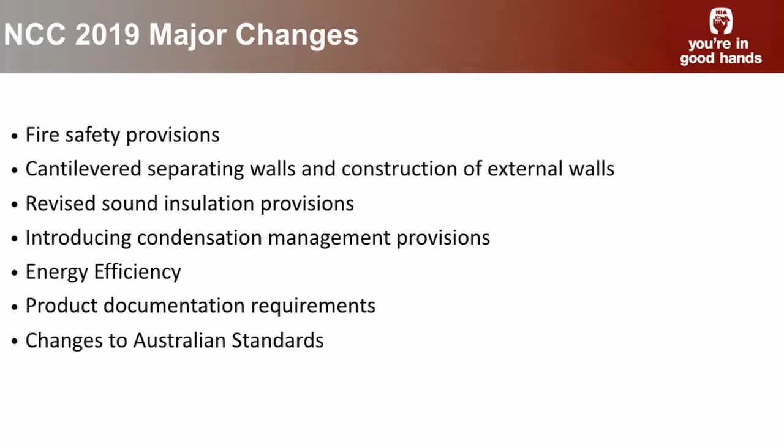So a fair bit to get through in this next session. I'll try and get through everything, but I'm happy for questions. If you can, I'll open up questions at certain times. And just a reminder, if you could turn your phones on silent, please, and we'll get started.

So in terms of the fire safety provisions, or the provisions in Part 3.7.1, it's now been split into 4 parts. Part 3.7.1 now deals with the material requirements, and in the very few circumstances involving non-combustibility, there are fire hazard property requirements for a house.

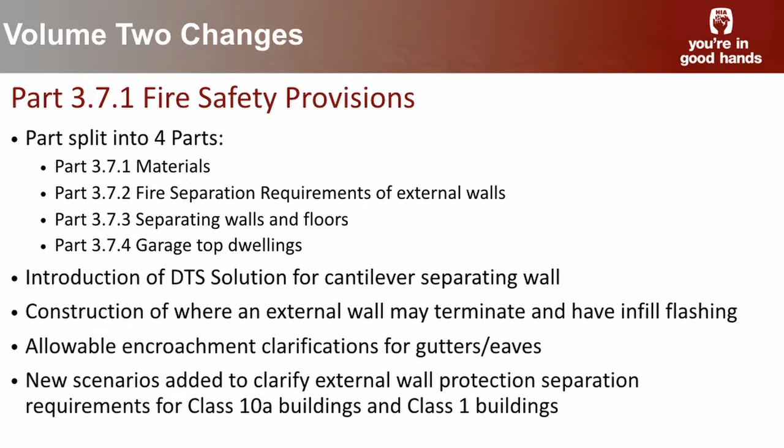Part 3.7.2 deals with the requirements for where a wall needs to have some fire separation or have a fire resistance level. The requirements now for separating walls and floor systems, and then the last one around garage top dwellings, which is your provisions for your Fonzie flats or your surveillance units, which have been incorporated into the code a few years ago as a deemed to satisfy.

So probably the big ones here are the introduction of the deemed to satisfy solution for cantilevering separating walls, some clarification added about where an external wall may terminate and have infill flashing, some provisions about the allowable encroachment provisions, and some new scenarios added for where an external wall requires fire separation, with more pictures and figures added there to address some of the questions that are raised.

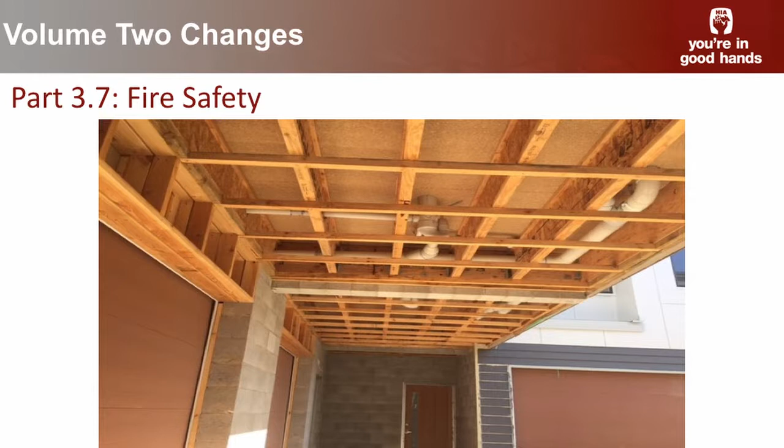So one of the changes is about the cantilever separating walls. Has anyone seen these cantilever separating walls come across your desk or built them? Obviously this is not one that everyone does, but where you might have your garage inset from the first storey and things like that. Has anyone come across this in your offices?

We're seeing it more and more across, particularly in new estates where you've got a row of townhouses and things like that, and for planning, trying to have that articulation of the streetscape. I can't believe I just said articulation of the streetscape. I sound like a planner, don't I? No offence to planners in the room.

So we're starting to see this emerge more and more, and as Tim mentioned, it was one of those ones where the code was some grey area on whether you could have a cantilever separating wall or not. And the ABCB have now adopted this as a deemed to satisfy solution.

So here's the solution, but before I get into it, I probably just want to talk about the difference, for the purpose of the National Construction Code, between what is an external wall versus what is a separating wall. An external wall for the purpose of the BCA or NCC is just that - it's the external wall of the building, and it would need to meet all your requirements for an external wall: fire if it's within 900mm of the boundary, weatherproofing, structural, all that for an external wall. Whereas a separating wall or a party wall is a wall that's common to 2 dwellings. So very different for the purpose of the NCC, and it's important to understand that context.

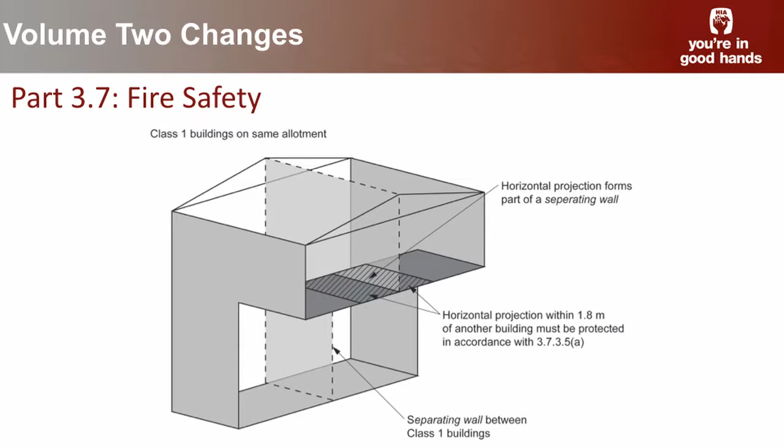What it requires is to have 1.8 metres out from either side of that separating wall on the horizontal projection, for that underside of that area to be treated, such as a fire-rated plasterboard or a fibre cement board, or a ceiling with a resistance to incipient spread of fire, and some other options that do exist. So there's a number of different options it could use, but it only requires 1.8 out.

Why only 1.8 out? Because it takes on that provision of the code where you might have two Class 1s on the same allotment, where you need to have the 1.8 separation.

So obviously you wouldn't see a scenario where you'd build out 1.8 with one part of a ceiling system, and then stop and start something else, particularly when a lot of these are rows of, in a new estate where you might have 15 of them in an allotment. So you're not going to have a 1.8 little bit of plasterboard or something else that doesn't need fire resistance, then 1.8 of a fire protective board.

You'd have that same requirement, but it didn't need to say that in the code, because that would be increasing stringency from the requirement of the 1.8 separation where you have the two Class 1s on the allotment. So we'll probably see more and more of this, and this provides an appropriate deemed-to-satisfy solution rather than having to go through the performance pathway for something that's very commonly done.

As I mentioned, and Tim mentioned it before, there are a number of proprietary systems out there in the market, and proprietary ceiling systems that you could use. So you'll probably see more and more of them advertised going forward. Some of them could still be used as a performance solution for a zero lot line wall, but for the separating wall, it's a deemed-to-satisfy solution.

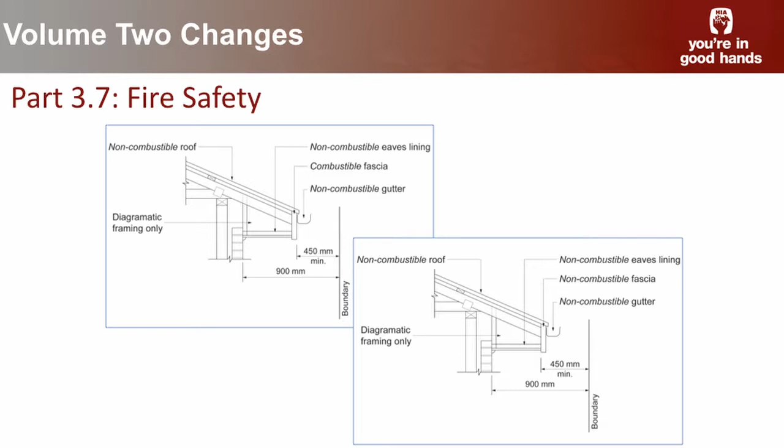For an external wall, it's always allowed that as an option to use your 60/60/60 or use a 90mm masonry wall. So now this has been adopted as an option as part of your separating wall requirements as well.

Another change is around the allowable encroachment provisions, and really it's more of a clarification. This is another one of those ones where the question was raised - so the allowable encroachment provisions for context, as I mentioned before, where a wall's within 900mm of the boundary, it needs to have an FRL.

Or use those other options I mentioned. Otherwise, the code does allow for where you don't build within that 900mm, to allow some elements within that allowable encroachment area, such as eaves. It has other things like pipes, down pipes, and air conditioning units - other things that just naturally aren't going to contribute to fire spread. But it allows for the eaves.

One of the questions raised was that the provision had some requirements where you had combustible elements in your eaves, and other provisions where if you use fully non-combustible materials - the question was raised, does that allow you to build all the way up to the boundary if you use non-combustible materials? Or does it just allow you to extend your fascia and your gutter beyond the 450mm? That's what the actual correct interpretation was.

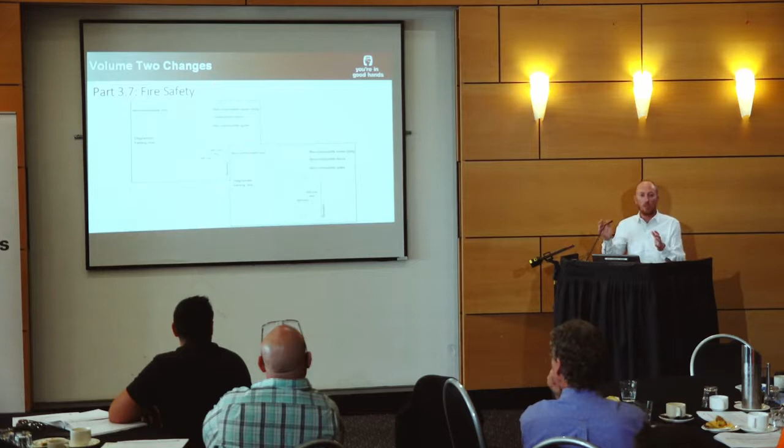Not to say if you use non-combustible materials, you can go all the way up to the boundary. Because if you think about that - if you build all the way up to the boundary on your side, and your neighbour did the opposite, you'll have a separation of maybe a finger's width between the two of them, and that's not what the code's seeking to achieve.

The code's trying to seek to achieve that 1.8m separation between the two dwellings - 900mm on your side, 900mm on your side - where these eaves would probably allow that 900mm in between. So it's been clarified in these figures about what the correct interpretation means.

If you look at my two figures, it's a bit silly because one says if you use combustible elements, you can't have your fascia in that space, but if you use non-combustible elements, you could have your fascia and your gutter in it. So for a metal fascia gutter, what is it, a couple of mil thick, to allow you to extend that.

So it's more about that clarification - no, you can't build all the way up to the boundary if you use non-combustible materials. If you build all up to the boundary, then you'd need to use the provisions for where the external wall is within that 900mm space and meet those requirements, and there are some different options you've got allowable for when you use those provisions.

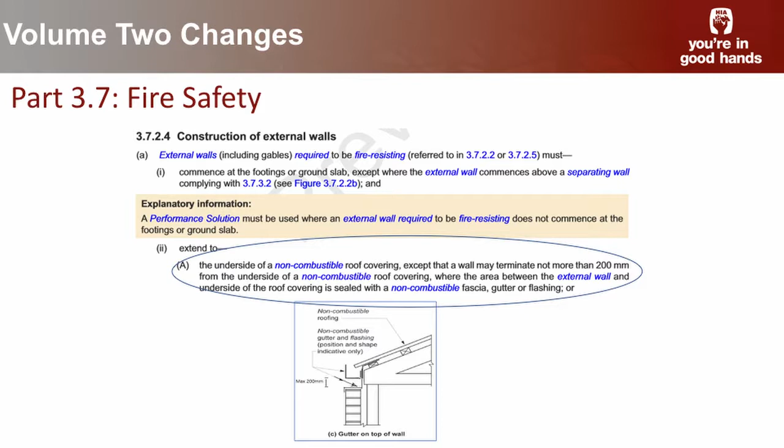And in regards to that provision about the construction of external walls, some other changes have been incorporated here. The Victorian Building Authority did an audit on their proactive inspections, and if anyone sees the VBA's

utes that have their vehicles parked out the front of a building site doing proactive inspections, it's always very interesting. They went round and found scenarios where people were building up to say 1.8m with brickwork, then doing above that, maybe putting fibre cement or corrugated metal for the rest of the wall up to the underside of the roof, or for the fascia. They went round and issued a number of notices calling this stuff non-compliant.

And we've said, well, that's not necessarily exactly what the code says. The code does have some provisions around this that could allow it. But their view was that there are 4 options in the construction of external walls in the code currently, and that doesn't reflect any of those 4 options, so therefore it would need to be done as a performance solution, not deemed-to-satisfy.

So we asked the question there - well, there is a number of scenarios where you might just do the bricks up to X height and then have a flashing to cover the rest of that space with, you know, cut bricks and other things, utilising that space. So what would be the acceptable level?

And what they've now clarified through the code is that you could have 200mm if you've got a flashing between the gutter and your cladding below - the bricks, or a tested system - so a 200mm space. It's written into that clause there.

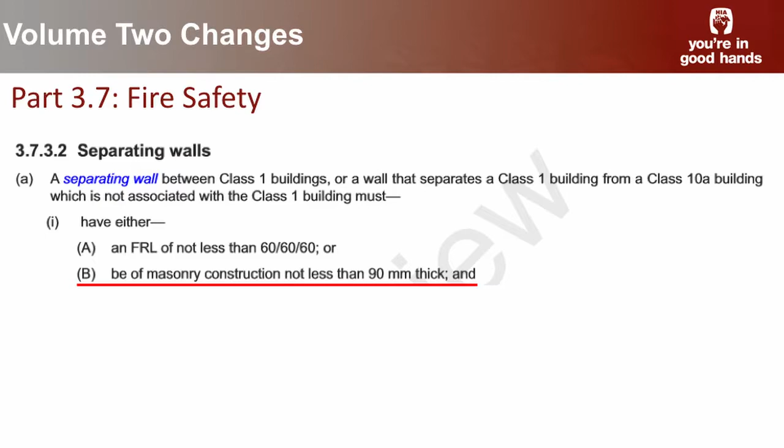I mentioned that change before about the separating walls, about the 60/60/60 or having a 90mm masonry, so that's just showing that on the screen there.

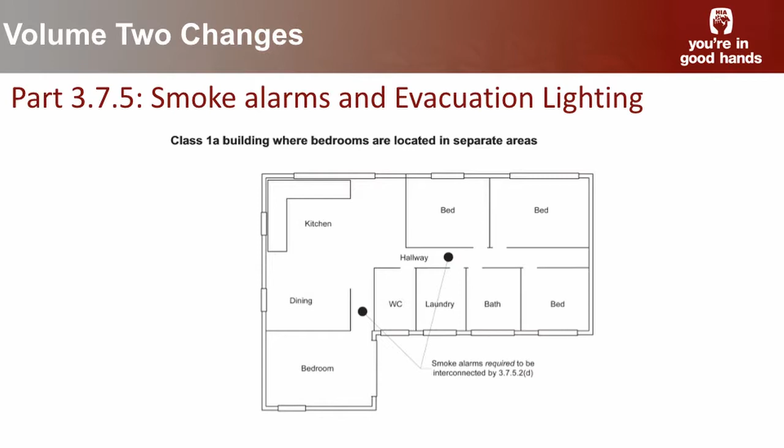Another change around the smoke alarm provisions - another one of those areas of the code that always seems to be under review. Another question was raised with changing floor plates in a number of dwellings now, where you might have a parent's room and parents' retreat in one part of the house, and then all the kids' rooms in the other part of the house - do you need smoke alarms in those separate areas?

Having a 3-year-old daughter, I would fully concur that having a parent's side of the house and a kid's side of the house is a very good idea.

But so the question was raised - do you need to have a smoke alarm in those 2 separate areas? And the code says where you have hallways or rooms connecting, where people may sleep, you need to have those smoke alarms in the separate areas, and now that's been clarified.

So also, if you remember, the provisions were incorporated a couple of years ago for the interconnection of the smoke alarms. So it's not just putting the additional alarm, it also needs to be interconnected.

When I introduced this change up in Queensland, the reaction was 'not another one', because they're already requiring smoke alarms in every bedroom, plus the ones in the hallways, and plus being photoelectric smoke alarms. So they're like, another one - this is going to be the most lit up house, and there'd be so many smoke alarms that you're going to be sounding the alarms all the time.

So that's one change - another one of those to look out for, to not get caught out. And with changing floor plates, I think we're seeing it more and more in terms of standard designs now, having those 2 different areas of the house having the smoke alarms.

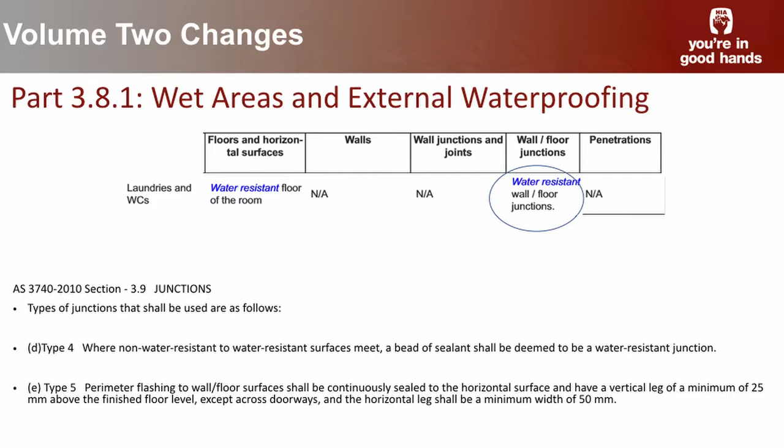Another change has been a requirement in laundries and water closets, that it no longer will be required to have a waterproof junction between the wall and the floor. It only now needs to be a water-resistant junction.

This is something that has been done in South Australia for the best part of the last 15 years. More of you were coming to HIA and others saying, with moves to polished concrete slabs and more contemporary materials being used, the difficulty of having the waterproof junction in these areas, European laundries or laundry cupboards as well—the question was raised, does it need to be a waterproof junction, which might mean a 50mm water stop and this type of thing? Can it just be a water resistant junction?

If you look at the other parts of the room, the walls don't need to have any protection, they don't need to be waterproof or water resistant. The wall junctions and joints don't need to be. The floor itself only needs to be water resistant. Why can't it just be a type 4 junction under 3740 using a sealant, or using a tile skirt and a sealant? And that was now adopted into the code.

Moving into more of those European laundries and contemporary materials, it was considered to be a reasonable change, and also these areas aren't the sort of areas that are subject to frequent water on them as if it was a bathroom.

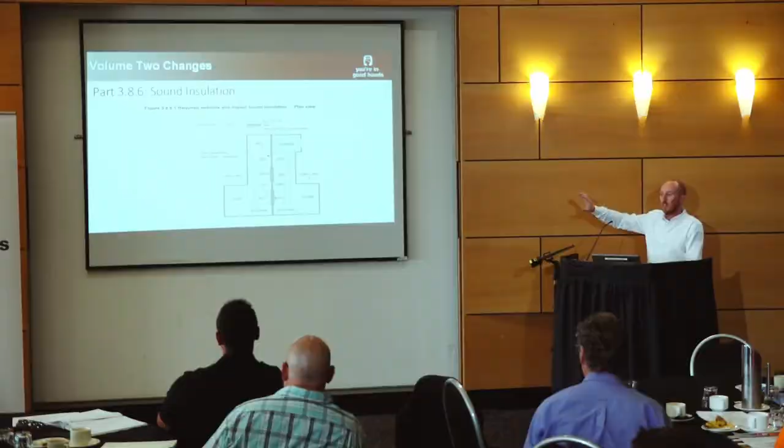Another change is around the sound insulation provisions, and you'll notice this figure—it's a figure for illustrative purposes really only, you wouldn't see a wall like this built. Previously the code had a table with the sound insulation provisions that talked about when you needed to have discontinuous construction, or where you could have single skin construction, and how you needed to treat it differently, where you might have a habitable room on one side to a bathroom or a kitchen on the other side, and where the different separation requirements apply.

This applies to a separating wall, not to an external wall or zero lot line walls. It's only applicable to separating walls, and now this provides a bit better clarity than that table. As I acknowledge, you're never going to build one that's single skin, discontinuous, single skin, discontinuous, but it's there for illustrative purposes to try and clarify the provision.

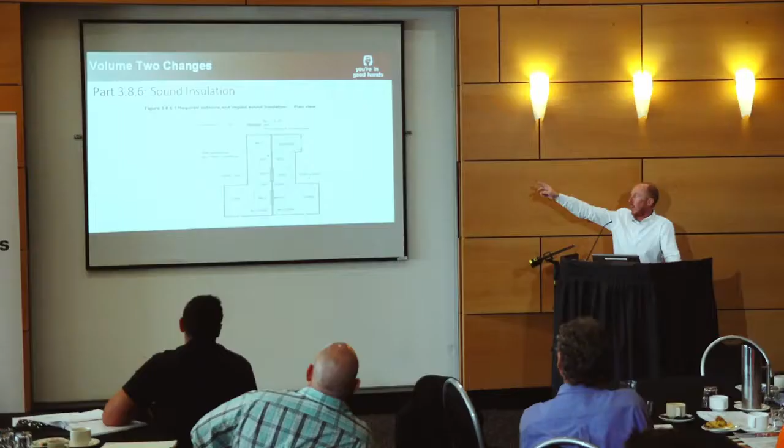One of the bits I will draw your attention to—there's been some differing views around this—is the separation of a Class 10A, which might be a garage on one side, and having to have separation requirements to a habitable room on the other side. That was not clear before, and now it's been clarified that that would require separation.

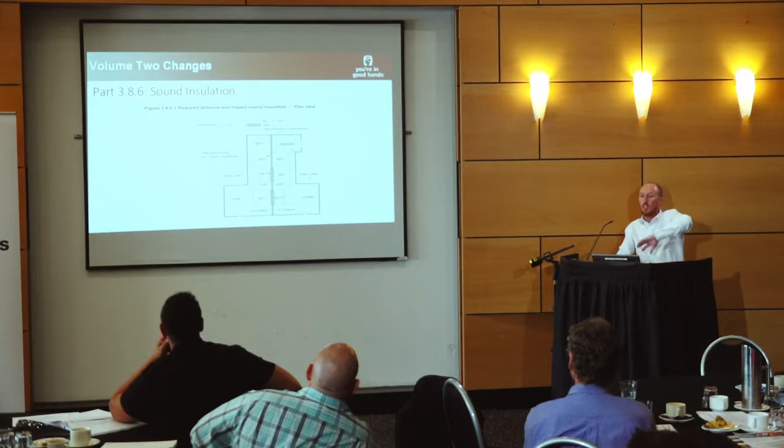Other changes to this also include that you could now have a sound insulated ceiling in lieu of having your sound insulated wall extending to the underside of the roof above. From a fire safety perspective, that wall would still need to go all the way up, but from a sound insulation provision, it could allow you to use a sound insulated ceiling rather than having that separating wall with discontinuous construction and other things into that space.

A lot of the time that would still be done based on how you build the wall, but that's given now. That was something that was in Volume 1 that wasn't in Volume 2, and HIA and others had raised some questions whether that could be incorporated into the code, and that was put forward.

Another change here—and this is one of those parts that really I think was a carryover, it was written for Volume 1 and then adopted into Volume 2—it had a requirement that you needed to stagger your joins on either side of the separating wall, so you couldn't have the same joins lining up. If you imagine the scenario on a separating wall between your dwelling compared to the dwelling built by someone else on the other side of your wall, you're not supposed to have a horizontal plasterboard join that's at the same level as the other side.

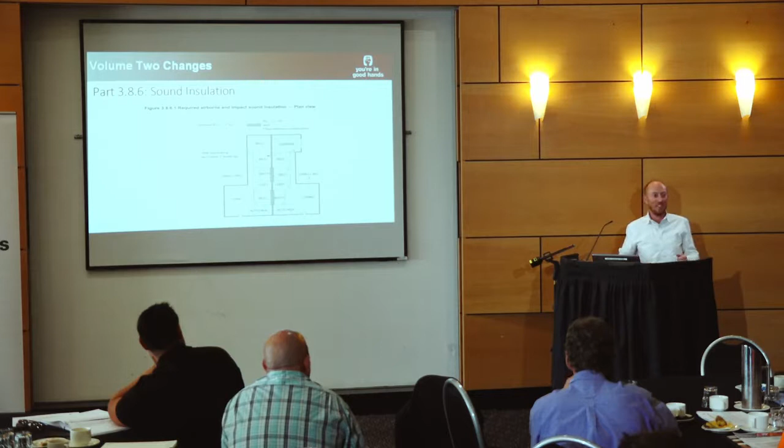I don't think anyone's ever followed that one too much. Imagine putting a 600mm sheet on your side and cutting and putting on the other, a lot of the sound insulated options will require you to stagger the joins on your own side of the wall, or you might have horizontal then have verticals. You can do that, but having it on opposite sides of the wall, I don't think we've ever really had that one enforced too heavily, and it'd be one of those ones—what purpose is it serving?

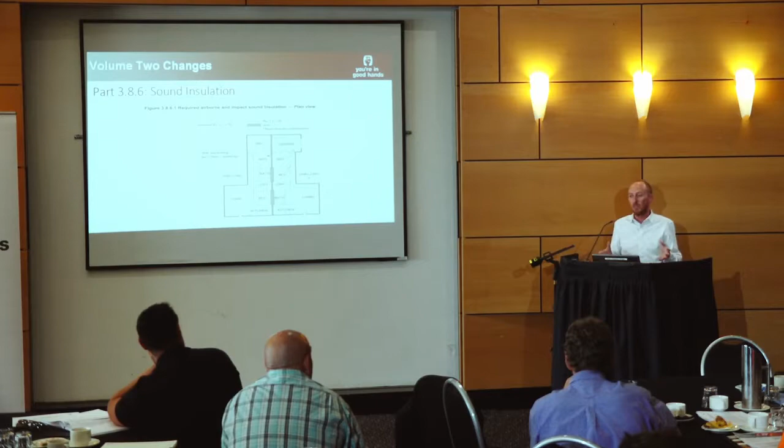Where it's in a Class 1 context, it's obviously much easier because your different SOUs are being built at the same time. So that was one of those changes that's been incorporated, and also some of the changes about how you treat surfaces in a sound insulated wall.

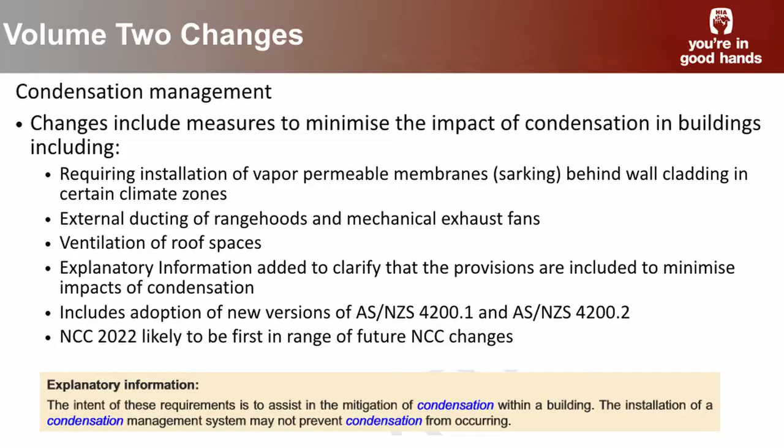Moving into the condensation management provisions - earlier today I talked about the performance requirement and verification method. Now I'm talking about the deemed-to-satisfy provisions. As I mentioned at the outset, the changes are there to minimise the impact of condensation in buildings, rather than saying you do this and you won't see any condensation appearing.

The provisions are really about two parts. One is trying to ensure we're not having a build-up of moisture in the wall cavity system that can't escape, which has two parts: health impacts on occupants from increased moisture, and also degradation of the building materials themselves.

The other part to the provisions is about ducting and getting that moist air out of the building itself, and there's a few different options there.

The new provisions will require the installation of vapour permeable membranes in certain climate zones - particularly all the climate zones in Canberra, and probably in parts of New South Wales depending on where you are - a number of those will be required. Also the ducting of exhaust fans, ventilation of roof space requirements, and adoption of the new provisions AS 4200 Part 1 and Part 2.

This is likely, as I mentioned earlier, going to be the first of a suite of changes for condensation provisions in buildings - we'll likely see more going forward. The stuff for 2022 is more those generic, simple deemed-to-satisfy solutions.

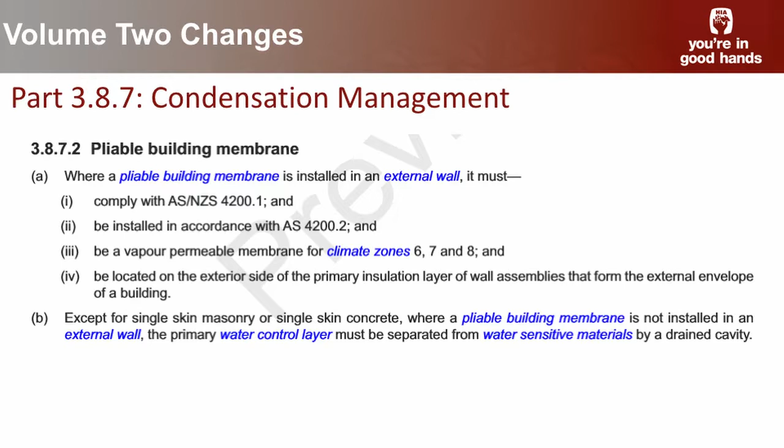In terms of the provisions, here's the first clause, 3.8.7.2, about the membranes itself. It talks about the pliable membrane installed in the external wall - not roof, external wall - needing to comply with AS 4200 Part 1, the material standard, and be installed in accordance with AS 4200 Part 2, the installation standard.

It must be vapour permeable for climate zones 6, 7 and 8, and located on the exterior side of the primary insulation layer - not external, but behind the cladding.

It does give some concessions for single skin masonry or single skin concrete, where you wouldn't require it, because where could you even put it? There's nowhere to put it for those scenarios.

It also says where a pliable membrane is not installed in the external wall, the primary water control layer must be separated from water sensitive material by a drained cavity. Not the best drafting of a clause, this one, I won't lie.

Essentially it's trying to say that if you don't use a pliable membrane, it would need to be separated by a drained cavity, which could be a brick veneer wall. Our recommendation would be that if you're going to put sarking in the wall, particularly in colder climate zones, use those vapour permeable membranes regardless of what might be there in terms of a drained cavity.

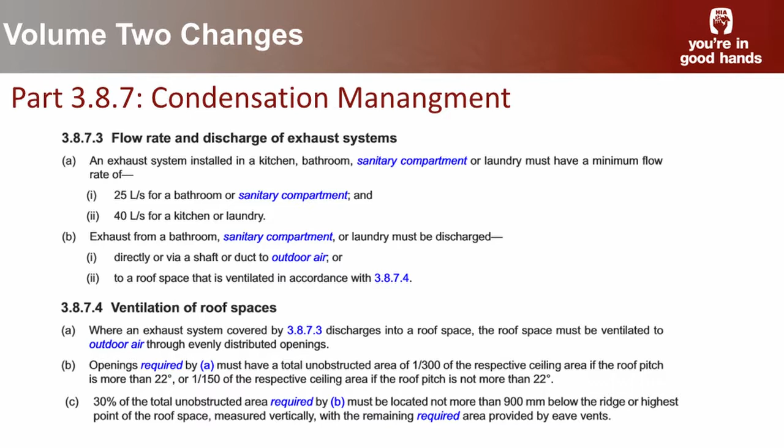There was already some stuff in the code around the ducting requirements, but they were fairly qualitative. It said if you had an unsarked roof, you didn't need to do it, or if you went into the roof space and it was adequately ventilated with open eaves - but it didn't really give a lot of quantification or prescription around what that actually meant. Now this is much more prescriptive.

If you go into the roof space, then there are all these calculations you need to do in terms of the roof space area, in terms of its ventilation.

It doesn't mandate for kitchen range hoods that they need to be ducted to the outside based on an airflow rate. It will for some, but some of those self-recirculating systems would be under that threshold of 40 litres per second. But again, for those ones, we really encourage, if you can, duct.

It's always better to get that moisture out of the building. It's not always achievable for all circumstances, where you might have a kitchen on a ground floor with a concrete slab, it might be centrally located, and that could present some difficulties. If you're doing row houses, it also could present some difficulties, but where you can, we really encourage you to do that, because getting that moisture out of the building is highly advisable.

From a Class 1 perspective, from a Volume 2 perspective, and for Class 2 buildings - I'll talk about this afternoon - those changes do apply differently for the actual range hoods for kitchens in a Class 2 building, where it will require you to duct to the outside.

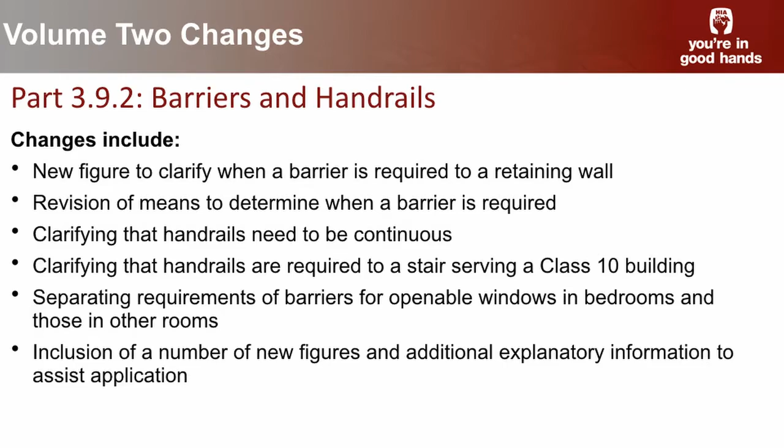So, some of the changes to the barriers and handrails provisions - the provisions have been through one of those reviews. Again, it's one of those sections that just always seems like it's under review, doesn't it? Every time you hear code changes, stairs and balustrades and handrails, there's always one that's under review.

But there have been some new provisions to clarify when a barrier is required for a retaining wall. There's also a revision of the means to determine when a barrier is required, rather than just having that blunt mechanism of where it's greater than a metre. It talks about where there's the ability to fall greater than a metre, so it gives a bit more of a sensible measure around that one.

It clarifies that handrails need to be continuous, where we're starting to see the scenario of a handrail going up one side of the stair flight, or even stopping on part of the stair flight, then moving to the other side, and then moving back. So it's trying to stop those scenarios and have a continuous handrail - with smaller dwelling sizes and things like that, we're starting to see a few of these different and interesting stair designs.

There still are some provisions around when you can break a handrail, like when you have your newel post and stuff like that, but there's some greater clarification around that.

Also, a provision has been incorporated to require handrails to a stair that serves a Class 10 building, where there is greater than a metre change in elevation, to have that handrail where it was previously exempt.

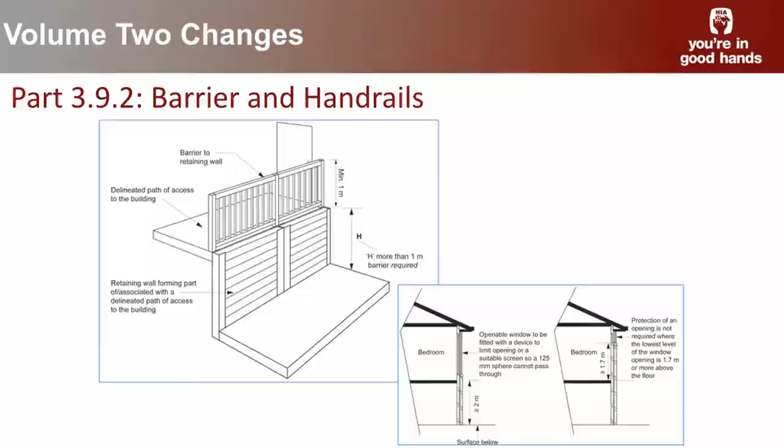There are also lots of new figures and explanatory information to assist application. One of the new figures is around barriers to retaining walls. This was always a requirement in the code, for retaining walls to have barriers where they form part of the delineated path of access to the building itself, with a handrail there. It's probably always been a bit difficult to understand, so the figure has been incorporated to help highlight that certain retaining walls will need a barrier where they're actually forming part of the principal entrance or the entrance into the dwelling itself. It's not for retaining walls up in the garden, in a tiered sort of situation - those generally aren't captured by this. It's those forming part of the access to the dwelling itself.

It's been funny, that one. Having this slide and the new figure has been getting a lot of questions on that one around the country, where people have probably always struggled with when a retaining wall requires a barrier or not. This is probably highlighting it more so, and I think it might lead to more questions rather than actually answering them all.

So another change, as mentioned, is separating the requirements for protection in bedrooms as opposed to other rooms, and a number of new figures have been incorporated to clarify those requirements. A lot of those figures were from the ABCB's advisory note or practice note on openable window provisions, which were developed a few years ago. Rather than being in an advisory note, having them in the code itself makes it simpler and provides clarity with the provisions.

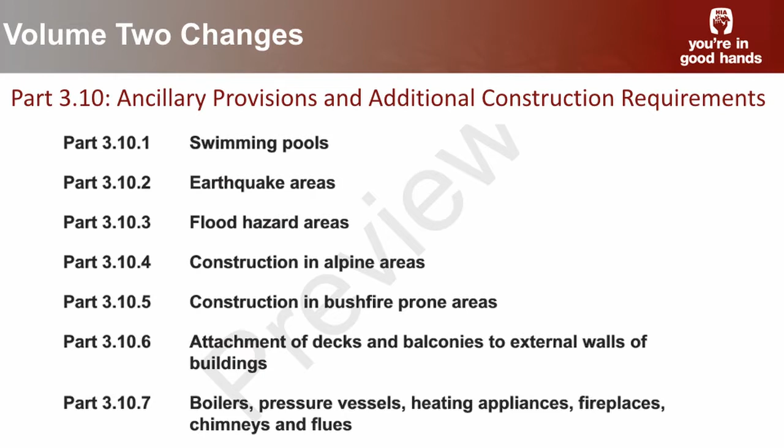A new part has also been incorporated, Part 3.10, which follows the Part 2.7 I mentioned earlier, and this brings together those ancillary provisions and additional construction requirements. If you think about it, the provisions of Part 3.0 up to 3.9 of Volume 2 deal with buildings that are in wind speed less than N3, meet geo limitations, don't have any additional flood hazard requirements, earthquake area requirements, aren't in an alpine area, aren't in a bushfire prone area - just your normal areas of building. This part then has additional provisions that apply when you're in those areas, on top of the common provisions across the rest of the code. There's also some ancillary provisions there.

None of this has really changed in terms of new provisions. Most of it is just being relocated here to make the code's setup more logical.

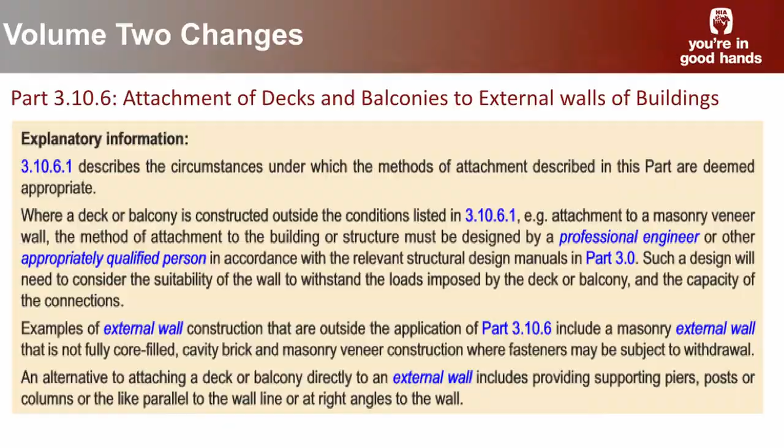One of the new provisions though is Part 3.10.6, attachment of decks and balconies to external walls of buildings. This part was incorporated because we've probably all seen scenarios of overloading of decks, decks shearing off the external wall of the building, collapses and things like that. A minister in New South Wales wrote to the Building Codes Board a number of years ago and asked them to look into this, particularly the attachment methods of the deck or balcony to the external wall of the building.

The provisions are fairly limited in what they offer in terms of prescriptive solutions. It really has application where you're attaching to a core filled masonry wall. There are some provisions for attaching waling plates, both to timber or steel buildings, but they are highly conservative, so you could still have your design done by an engineer, which might come up with a more workable and reasonable solution for the particular scenario.

I think one of the most useful parts of it is the explanatory information, which clarifies what we all know - that you shouldn't be attaching waling plates and other things to hollow core brickwork. In those circumstances, unless there's a really engineered design scenario, you should be looking at including another row of stumps or piers rather than trying to attach it to that external wall. Where it's a wire cut brick or a hollow core brick, what sort of support will that actually provide?

So that's another area where there's a new part to the code, and it clarifies a lot of what I just mentioned - that it's one of a number of options you could use.